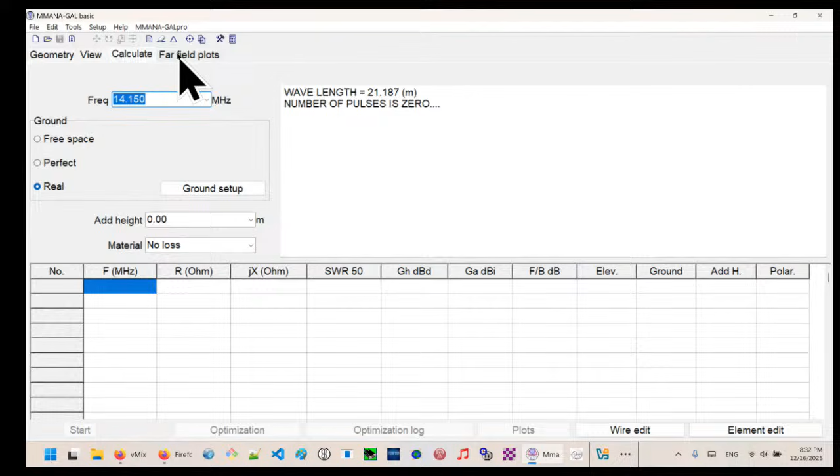Yes. Okay, so what I've brought up right here is MMANA-GAL Basic, as the upper left-hand corner indicates. On the menu bar, you'll have the basic file, edit options that we'll touch on briefly. But I'd like to point out these four tabs right here. This is where the functionality, like a wizard, goes from left to right. We start with geometry, view, calculate, which has the start button. In other words, this is the gut of the program that's going to generate the results. And then we view the far field plots, the azimuthal and the elevation. We'll talk more about that in one second.

But since our goal was to model a 20-meter vertical, let's go ahead and get started. We are in the geometry tab, and we're going to type in here for name, just to keep our thoughts in order: Vertical 20 meters, 20-meter antenna.

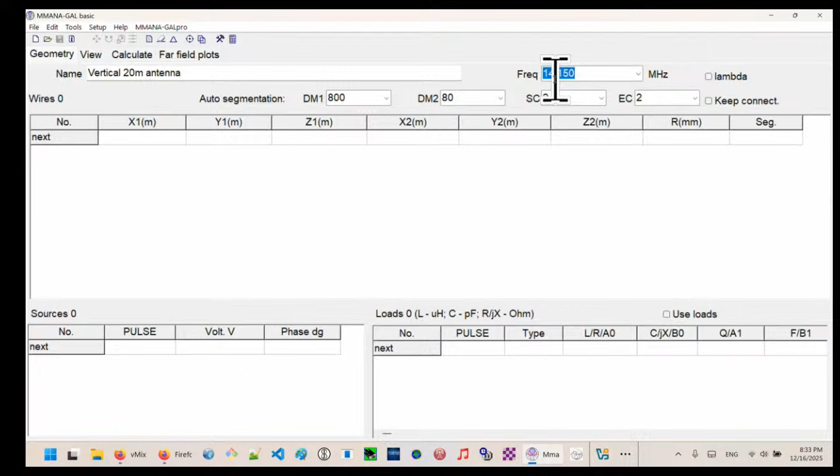Okay, great. So the program, if we hit tab, it goes over here and tells us the frequency is going to be 14.150 megahertz. That's fine. And notice in the main body of this graphical user interface, we have what starts looking like an Excel spreadsheet. If we highlight the first cell here and hit enter, we end up with zeros for X1, Y1, Z1, which is one of the points of our antenna. And then the second point is also going to be 0, 0, 0 at X2, Y2, Z2.

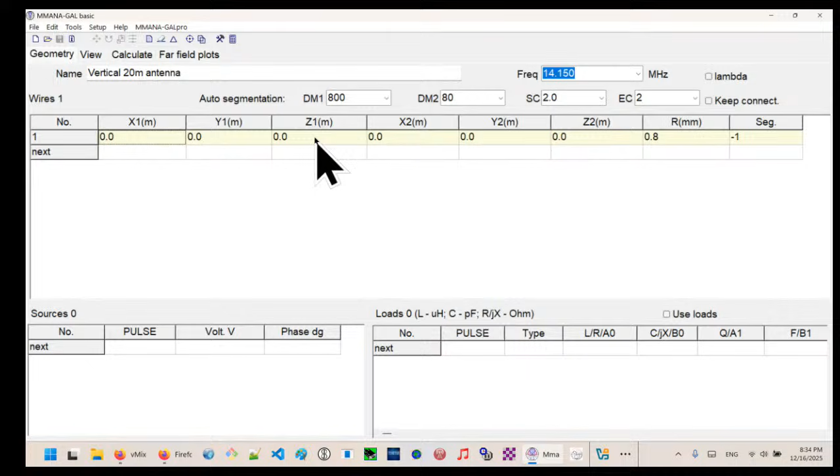The X sub 1 and X sub 2 points are two distinct points that define our antenna. The X1 point we leave at the origin, 0,0,0. The X2, Y2, Z2 point only has one component: 5.1 meters. Notice we're dealing with meters here. We hit enter, and that's all we have to do for modeling the simple geometry we've come up with.

We leave this alone and now go into View. This is a view of our antenna that we just defined in geometry. If we move the mouse sideways while holding down the left mouse button, you can see the rotation of the model. The x-axis and y-axis have nothing, or 0, but there's a displacement on the z.

If we hold the shift key and then drag the mouse down, we're able to move the entire antenna vertically or sideways. This is overkill for a simple geometry like the one we have here, but in more complicated antennas this quality control step is very good, since we can see the antenna we're going to be modeling.

Now we haven't added a source, which is what we're going to do now. We place the cursor over the base of the antenna, right-click, and select 'add source to the beginning of the wire.' Once we do that, the program adds a little red circle, just like in our PowerPoint presentation, in our free body diagram. That circle in the legend denotes the source. That's where we're going to be applying our feed point, our test voltage.

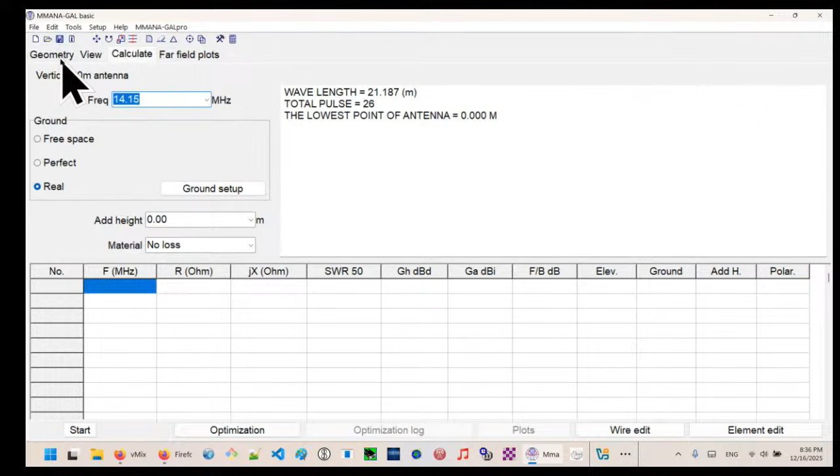If we go into Calculate now, the third tab—3 out of 4, so we're just about there—we're presented with the following. First, we're reminded of what frequency we're going to be modeling, remember we defined it in Geometry. We left the default at 14.15 megahertz.

That's fine. The next step is a box for ground. We have free space, perfect, and real. Free space is essentially an antenna radiating into a vacuum, out in space, and that's too much of an idealization here. So we're going to continue not with a perfect ground, but with a real ground. We select that option box and click on the Ground Setup button.

A dialog comes up that we'll leave mostly default, so no need to worry about it. But I'd like to point out, for example, we're modeling this antenna with default parameters: a dielectric constant of 13.0—the program came up with that, we didn't add it—and a conductivity of the ground at 5.0 millisiemens per meter. That's by default an average type of ground.

If you look in the antenna handbook, the ARRL antenna handbook, or online, you can get conductivities and dielectric constants for different types of ground. For example, if we model over salt water, say we're taking this on a sailboat and want to model the salt water effect, we'd change this conductivity to maybe 5,000 millisiemens per meter to make it more conductive. Or if we're in a desert terrain, we might want to change that conductivity to a very low value. Again, we're able to change this—I'm just saying that in passing.

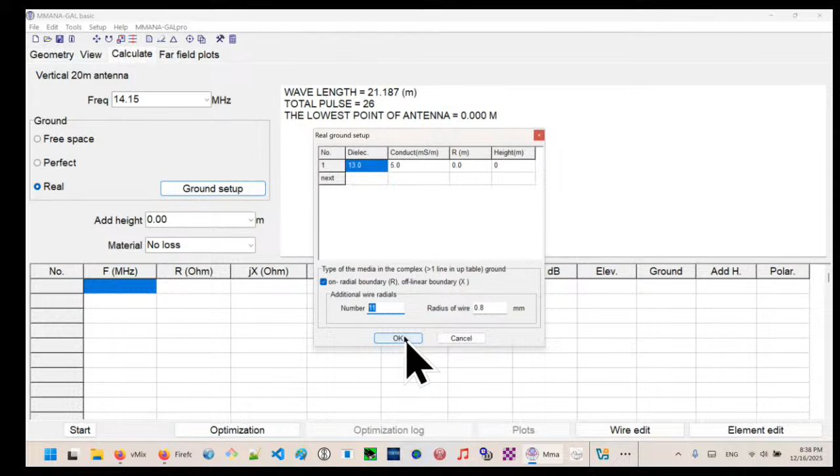The next thing to do is add the height. Remember, our free body diagram had this flush on the ground—the feed point was flush on the ground. So we don't want to change anything away from 0.

We could go ahead and use the drop down to select 5 meters, 7 meters, but we're going to leave it at 0 meters. Again, in passing, we notice that the units are meters we're going to have to use here, and we're going to have to do the conversion if we're keen on thinking in feet.

As far as the material for our antenna radiating element, we select this drop down right here, and we see quite a few options. We're going to select copper wire. Notice there's quite a few others, aluminum wire, iron pipe, and so on, but we're just going to go with a simple one, copper wire antenna. So we're at 0, flush to the ground, copper wire, real ground, we defined it.

Now we're ready to click start. As soon as we click start, the program has run. It's amazing to me still how fast this will run and do these calculations.

I'd like to point your attention to this SWR value right here. It's showing 1.45 for our SWR, assuming feed point impedance, an input impedance of 50 ohms. And the resistance of the impedance, the resistive component, the real component of the impedance for our feed point is 35 ohms, which is fine. I mean, it's not 50 ohms, but it's close.

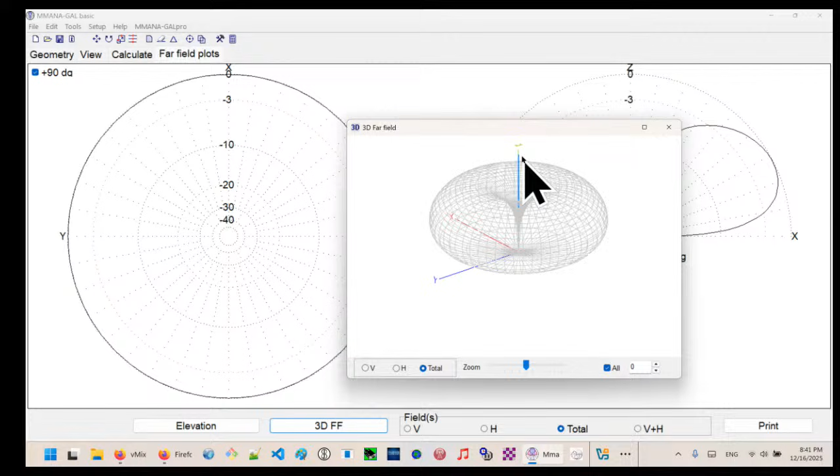Now, of course, this is an isotropic antenna pretty much, so it's going to be homogeneous in every direction. But in other antennas, we're going to have a preferred direction, and this might give us that insight of where our radiation pattern is going to be relative to the antenna. The antenna is that blue line, light blue line right there in the axis. It's a vertical that we did.

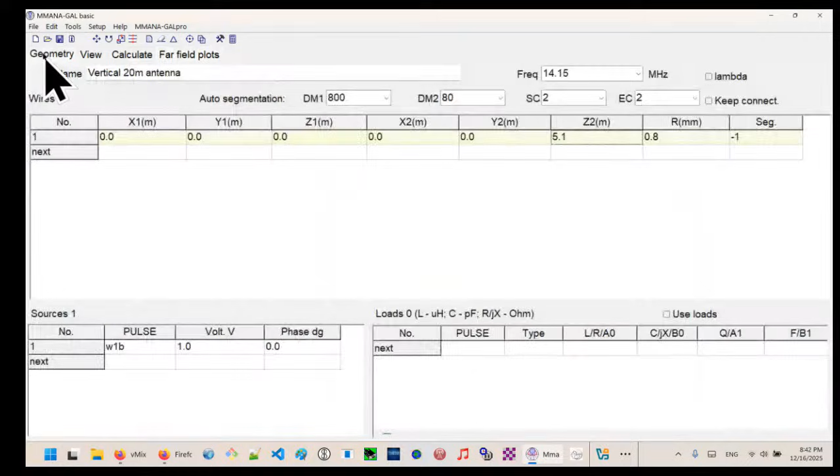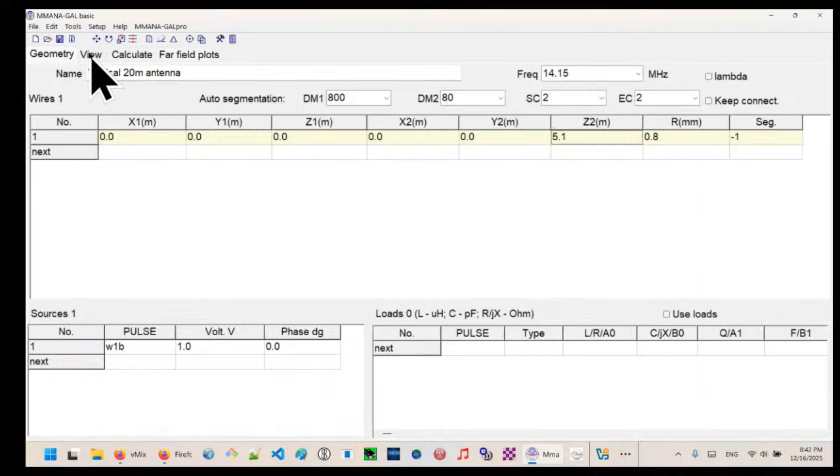So that is as simple as it gets. That is the modeling of our antenna. Once again, we went to the geometry tab. We defined our sub 1 coordinates, x, y, z, in 3 space, and our sub 2 coordinates, x, y, z, in 3 space. And we defined that one at 5.1 meters, whereas the origin was at 0. We double checked our geometry to make sure we weren't drawing any weird diagonals.

By the way, now the program has actually also added this fellow right here, which is the current profile for the current on our antenna. And then we clicked on calculate, defined our ground, our wire, and our height, and clicked start. And after that, we were actually running, getting the results, and even in 3 dimensions. So with that, we've modeled a vertical antenna.

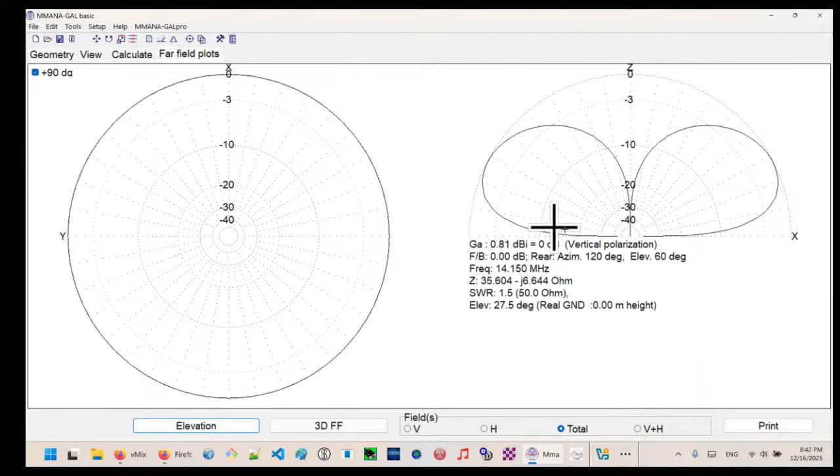So let me pause right quick and see if we can go to our presentation. And in our presentation, we had this exercise, which we just went through. The next exercise was going to be, try this.

I think I should have done it from the current slide as opposed to this, but we'll get there shortly. Well, actually, let's try this. Stop sharing, and then we'll go here and model our dipole antenna. Let me just do this one. And this, yeah. So if we do from current slide, there we go.

The practical exercise number 2 that we're going to do is modeling a 20-meter dipole antenna. Again, with our free body diagram for our dipole antenna, we have this hatched area, which is the ground plane. Okay, now we're not seeing that, we're seeing the slide that says how was the antenna modeling done.

Let's try this. And by the way, your audio has not dropped a single time. Oh, that's a good thing. Yeah, I'm trying the computer. Okay, so if we do this, and now we share this to the entire screen. Okay, so I'm just going to leave it here at this screen right here.

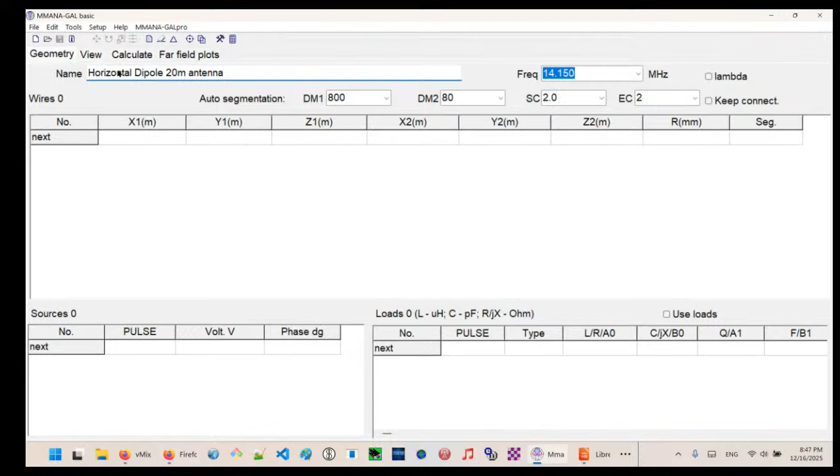So again, this is the MMANA-GAL screen, MMANA-GAL basic like before, and here we're going to define our horizontal dipole. Again, we start with the leftmost tab, geometry. We name our horizontal dipole 20 meter antenna tab, and by default it's going to model at 14150, which is fine. We'll leave it there.

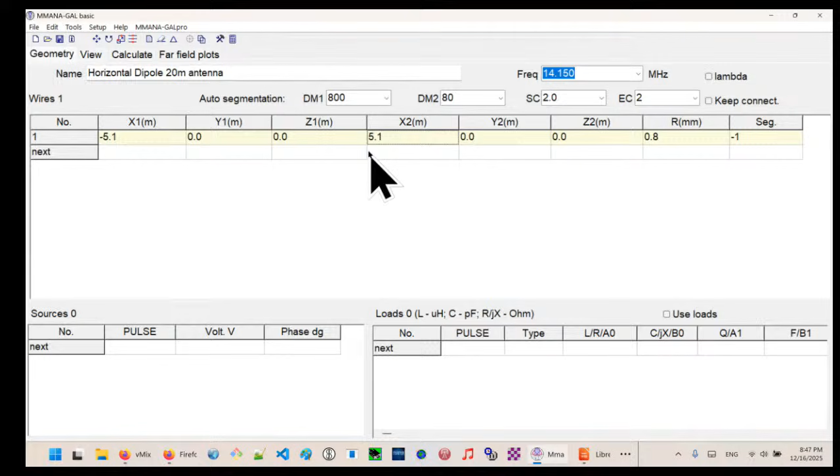We could change this, but as before, we highlight the first cell of what looks like an Excel spreadsheet, hit enter, and now we have our sub 1 point and sub 2 point, the 2 points that define our antenna. This time, we're going to put minus 5.1 meters for the x direction of the first point, and the second point is going to be at positive 5.1. In other words, it's going to be symmetric, 10.2 antenna length. At least that's what we're trying to model. That's where the view tab comes in, to make sure we're not going diagonally or we mistyped something. And it seems like we got it okay. It's along the x-axis. The y dimension and the z dimension are 0.

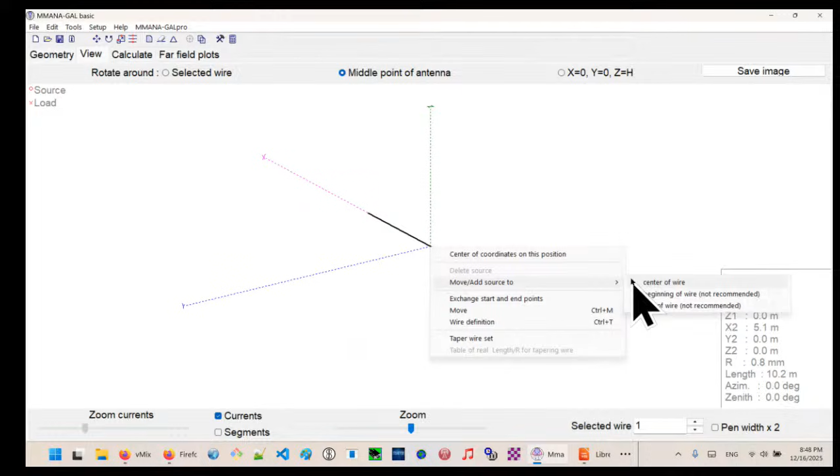We're not modeling elevation now. We're going to model that in the next tab. But we do need to go ahead and add the source. So again, as before, we hover over the middle and say add source to, in this case, the center of the wire. The previous one, it was the beginning of the wire. Now we're going to go to center. As soon as we do that, we notice we have a red circle in the middle. That's our feed point—look at the legend, it calls it our source.

In passing, we notice there's a capability in this program to add loads. That would be for a future video, but we could actually add coils and loads, more complicated geometries in other words. But not now, we'll just continue with this simple dipole.

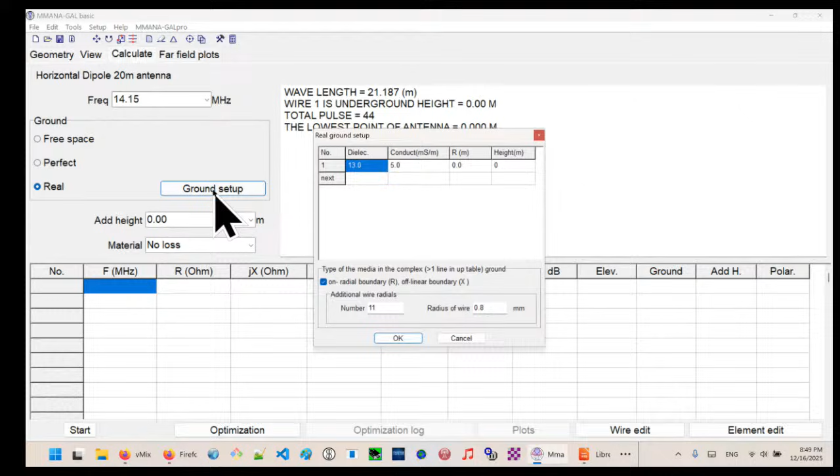When we click on the Calculate tab, as before, we double check the frequency we're going to be modeling, 14.15, that's fine. Now, the ground—we again go with real ground, and this time we click on ground setup, and here all we're going to do is leave the ground the same, but we're going to remove these radials because it's a horizontal dipole, so we're not going to be too interested in radials. Now we said we're going to do it at a height of 10 meters, so we'll go and put 10 right here.

Fair enough. Click on start. And here we go. Our antenna's SWR, this parameter we look at, is showing us an SWR of 1.88, assuming a feed point impedance of 50 ohms. That's not bad, it's less than 2. The resistance of our feed point is 73 ohms. Okay, it should be 50, but we can live with that.

Let's look at what our radiation patterns are. When we click on the radiation patterns, we get something different than we did before. Now, this is a horizontal dipole, so we would expect it to have a different azimuthal radiation pattern than our vertical.

The left-hand side has our azimuthal plot, the right-hand side has our elevation plot. Think of the azimuthal plot as where the cursor is - that's the crow, like a bird overflying our antenna. It passes the origin and keeps on going in this direction. Remember, we modeled it with minus x, x at minus 5.1 and 5.1 positive. So this is the axis of our antenna.

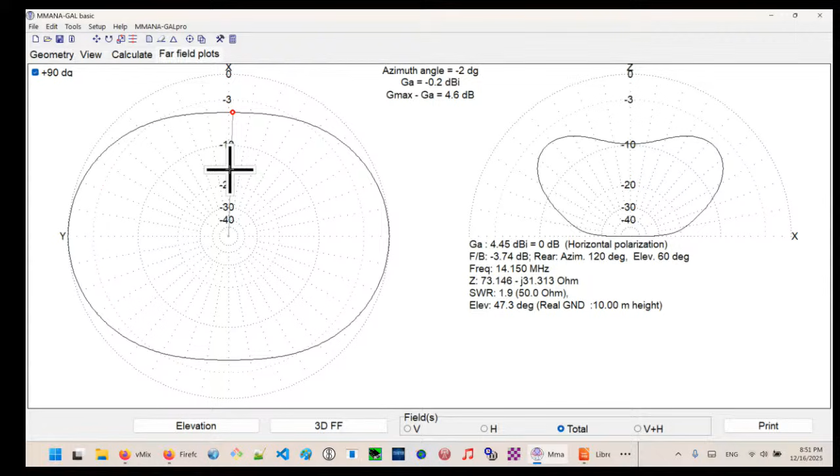This is actually useful for comparative purposes. The idea being not to get too hung up on the actual value of minus 0.2 dBi versus 4.4 positive dBi here, but relative. This is more of a null compared to this. A relative measurement is what we're getting here, not an absolute dBi that we want to hang our hat on.

The other thing we notice is the cut across way - it's like we took a chainsaw right across our azimuthal plot and we get this elevation plot. We can hold down the mouse and see at 5 degrees what this would look like. So we start seeing if it's going to be a good DX antenna in this direction or that direction, or more of a cloud burner if it's radiating in this direction.

But as before, you and I think better in 3D, so let's click on the 3D view, and we get this type of a flattened bean or squished figure, which is exactly what we'd like to see.

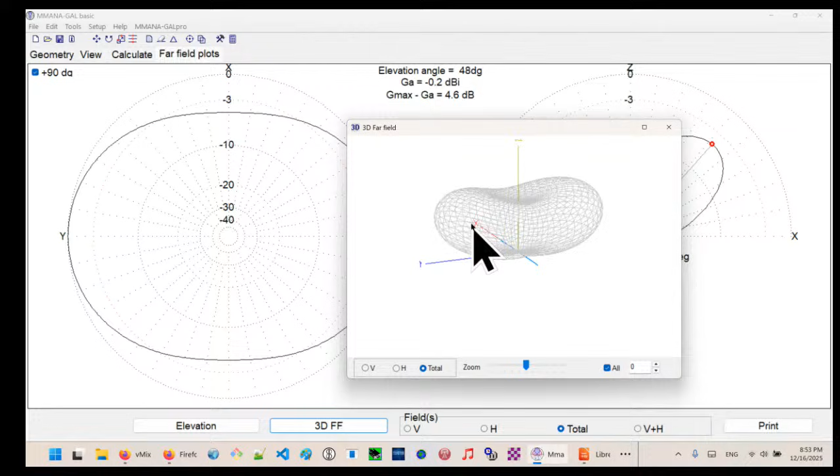If we see that we are on the x-axis here, you see the light blue right there? That's where our antenna is. So we're seeing that it's not going to be very good straight up, which is a good thing - it's not a perfect cloud burner. It's going to have strong lobes in those directions, but they're both going to be broadside to our antenna. Our antenna is aiming this way, and broadside to it, 90 degrees off, is where the strongest radiation gain is going to be.

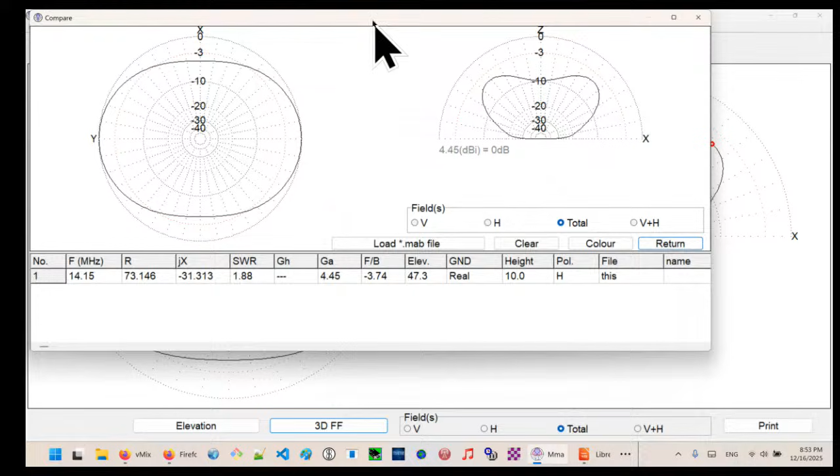Okay, so now hang on - it would be nice if we could compare this to our previous display. Well, there's a functionality here that actually says compare. These two sheets superimposed gives us this display, which is the same as what we have back there. But bear with me, if we say load MAB file, we can actually compare it to previous ones we might have saved, and we save it by going into File and Save.

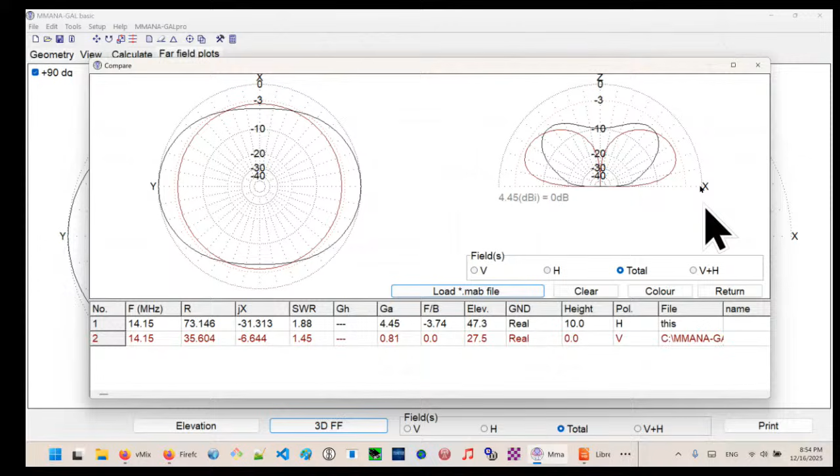But I saved the vertical 20 meter, so let's compare it. Now we can actually see something interesting. For DX, it seems like at 5 degrees, which would be right about here, the gain of the vertical antenna, highlighted in red over here, is better than the gain of this dipole, at 5 degrees. So that's a comparative feature that this program has to compare different antennas.

Also, we could go ahead and say, well, what about if we click on calculate and we change one of these parameters? What if we change the height? Maybe we don't want to hoist this antenna up 30 feet - what if we just hoist it 15 feet? That would be about 5 meters. So we click on that, we click start.

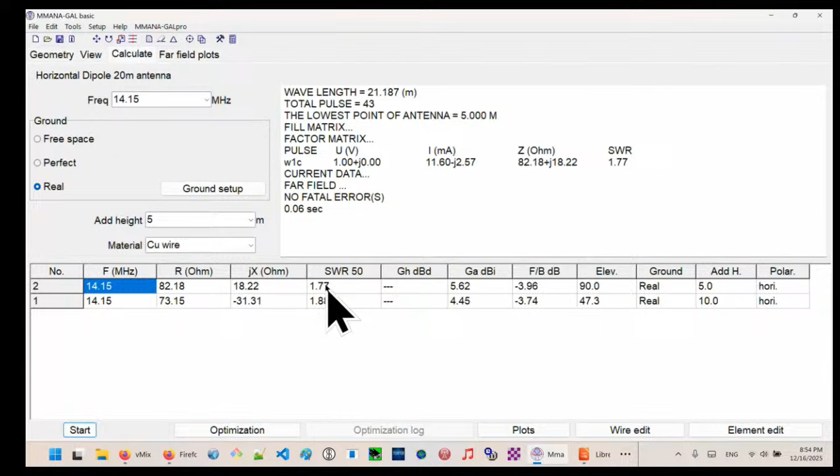SWR is 1.77, resistance is 82. What about our far field? Just by lowering our antenna from 30 feet down to 15 feet, remember we went from 10 meters down to 5, then at that point we're seeing that this antenna is much more of a cloud burner than when we hoisted it up 30 feet. So from that, we're getting insight into the effect of displacement in the Z direction of our radiating element, for this geometry.

So with that, we're going to go to the final exercise, which may be a bit more challenging. But any questions on this? Is this clear as mud?

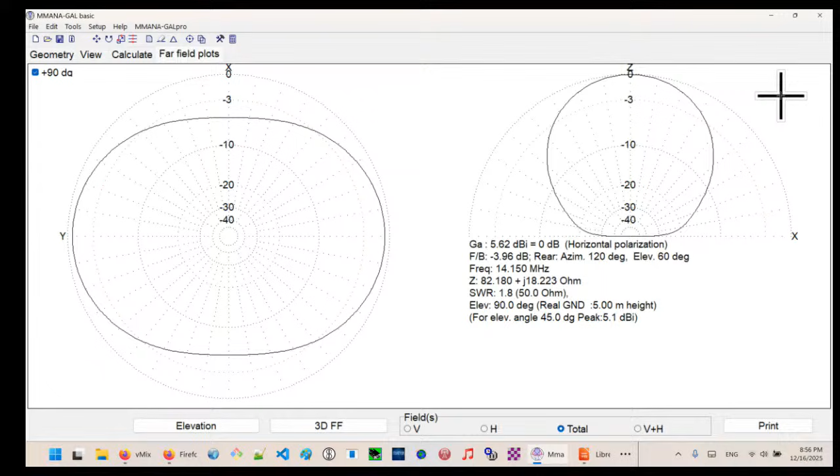Well, I'm following you, and it's interesting how you can easily change things like the height above ground and see the different patterns here. I think that would be good, Tom. Lately, the last month or two, I've been experimenting with antennas, and I can watch them on the analyzer, and as I pull them up in the air, you can see a big change when you go through 10 feet, 15 feet, 20 feet. So there are some points there that probably make sense in stopping. I mean, height is not everything.

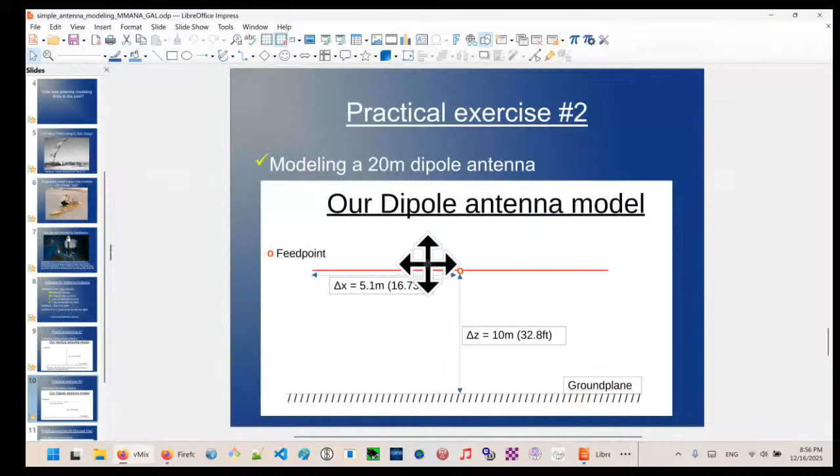Exactly, exactly. So I think you're going to love this final exercise that we're going to do. Let's go ahead and close our MMANA-GAL, and if we go here to our presentation, I'm just going to go like this. Okay, that's fine, one space down. This is going to be the practical exercise number 3.

This is the last one, so I'm not going to bore you anymore. But this one is a cool one. This is called the end-fed half-wave antenna.

So then the question that can be asked: what if we model this antenna without the counterpoise? Will that have an effect? I think that's going to be some interesting insight. Oh yeah.

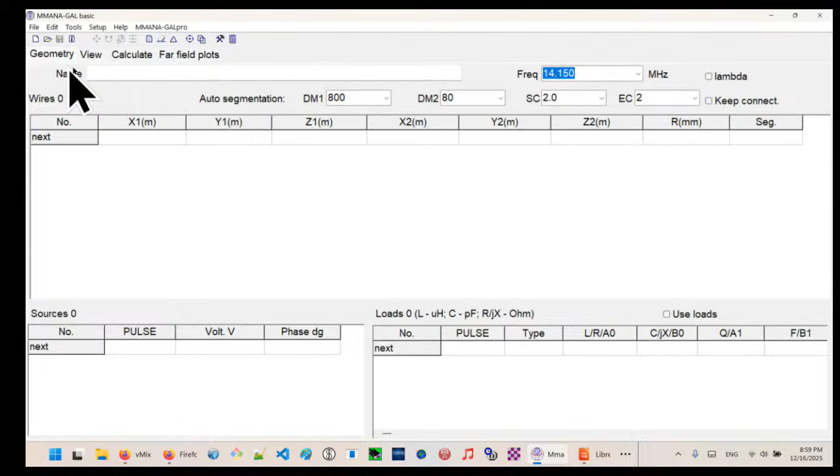And there we go. Once again, we're presented with MMANA-GAL basic, and we're starting in the view over here, configuration. We can go to geometry.

Now what we're going to do here is go for the end-fed half-wave antenna. And notice we're not putting a 20 meter or anything like that, because this is going to be resonant on multiple frequencies, and I think that's going to be interesting to see.

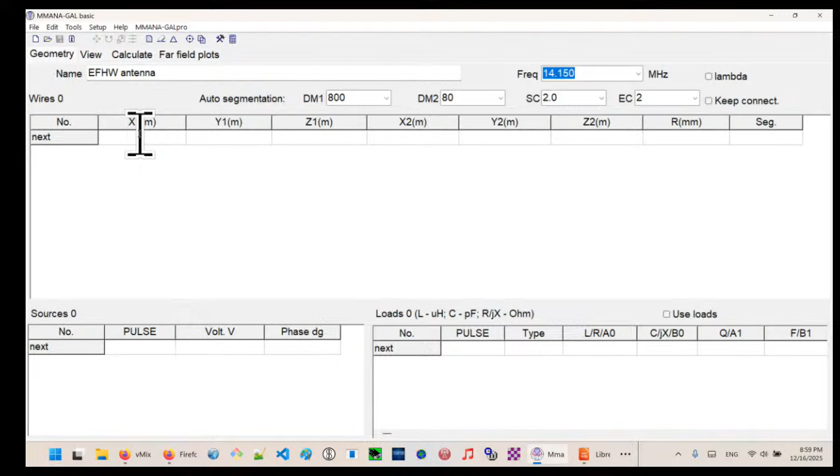So as usual, we go ahead and go into here to the first cell, hit enter, and we see that we have our sub 1 point and sub 2 point, 2 points in 3 space that define our antenna. We're going to start at the origin there, 0, 0, 0. We're not going to change that.

Our x2, though, where we want to take that one to, is going to be 17.68 meters. Hit enter. And our z2, our y2 is going to be 0. In other words, we're going to be flush or coplanar to the xz plane. I'll show you in a minute here with the view presentation.

10.218. That's what the calculation showed to be, to account for a 67 foot length wire, which we're going to start and see how that works.

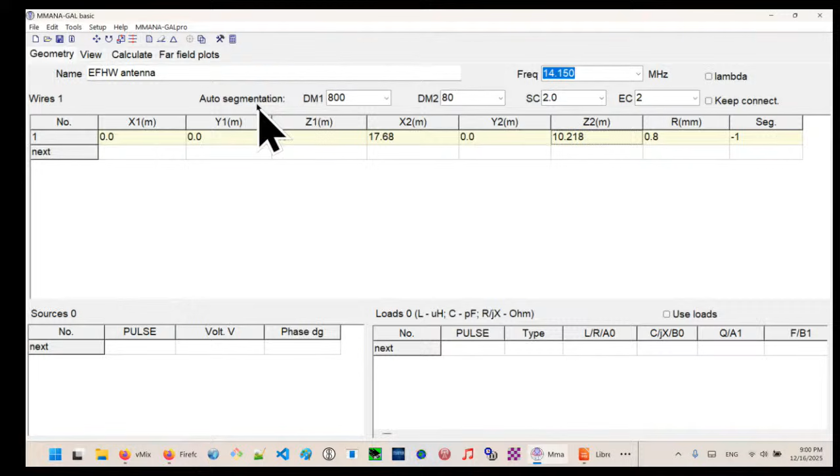Great. So now, as before, we click on view to make sure that this makes sense, makes physical sense before we start running our modeling. We again hold the left mouse key and the shift, and we can actually move this around. We let go of the shift key and we're able to move it.

And we see right there that our antenna, that black line, is coplanar to XZ. In other words, it's flat against the XZ plane. Once again, we just do this, and we see we don't have any displacement in Y. So that's okay. That's what we wanted to model.

Before we leave this screen, normally we define our source. So we hover over the base of this fellow. We right-click add source to the beginning of the wire. And there we are. We shift, left mouse click to lower this down, and we see right there our 0, or our little red O, which according to the legend is the source. So it seems like we're modeling the right geometry.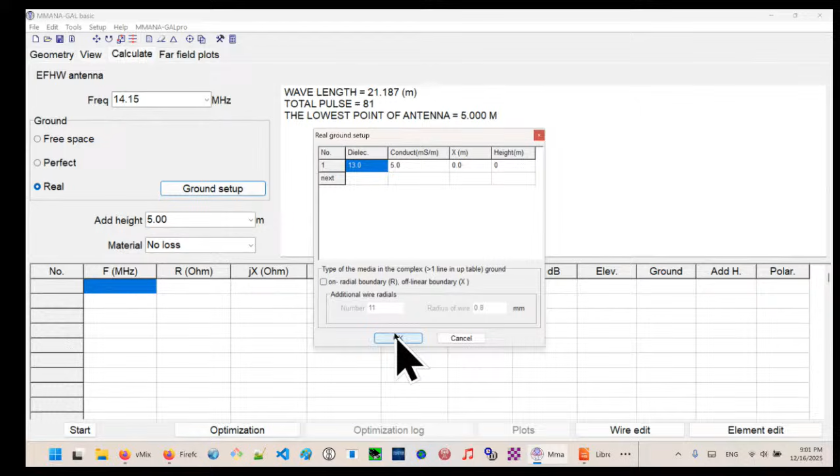Now let's go calculate. For this one, let's make sure our ground hasn't changed. No, we're not considering radials, and we're good. So I'm going to just assume a basic type of ground.

The height, remember it from last time, but we want to do it at 1 meter. Remember, we said it was going to be about 3 feet off the ground that we're going to tie our 49-to-1 transformer to. Oh no, the drop down doesn't show a 1 meter. It says 0 and 3. But hang on, what if we just change this over here?

The guy said this was a free text, so yep. So it is a free text, and we just changed it to 1. So it took it. So we added a height of 1 meter off the ground, and we're going to say model it of copper wire.

Okay, great. So now, as before, we just mindlessly say start, and we got garbage. Why? Well, because we're getting an SWR of 1 to 12,273.

But wait a minute. For an end-fed half wave, remember, we have a 49-to-1 transformer. Well, how do we model that? Well, the input impedance of this model that we just ran is 50 ohms, but that's not correct. If we say 1 to 49 is 50 ohms to what value? Well, 49 times 50 is 2,450 ohms. So our input impedance is going to be 2,450 ohms.

So we need to change that. For that, we go to Setup, and there's the option under Setup called Setup. And right here is where we change the standard resistance of the feed point. So we go ahead and put in 2,450, okay? And now we say, okay.

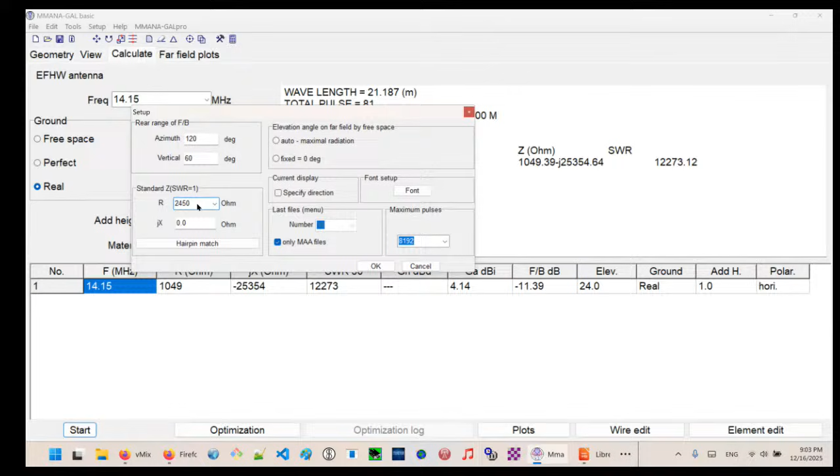Great. So the program just ran. The good news is we're now modeling a feed point impedance of 2,450 ohms, purely resistive. But the SWR continues to be 1 to 252. That's not good. So what could be wrong, right?

I mean, as engineers, we go ahead and troubleshoot. Let's go back to our view. And at this point, one thing we notice is, you know what, we're not modeling that counterpoise. We should, we don't have anything back here. It's like 0 counterpoise. Well, let's model a counterpoise.

So how do we do that? Well, we're going to model a second element. We go to the next row and hit enter.

And here we have the sub 1, the origin is still going to be the original point, point number 1. But point number 2, along the x direction, we're going to say minus 2 meters. Why minus 2 meters? Because when I go to the park, I usually have a coax that's about 6 feet, maybe 10 feet, all the way from my radio to the 49-to-1 transformer. So let's model it as a 6-footer. Why 6? Because remember, this is meters, so we have to multiply by 3.2808 to get feet. So it's right about 6 feet.

Okay, let's look at the view and see if we did something wrong. If we move this sideways using the left mouse button, we see that we've indeed put in our counterpoise, our little pigtail right there. Okay, cool, so that seems to be working.

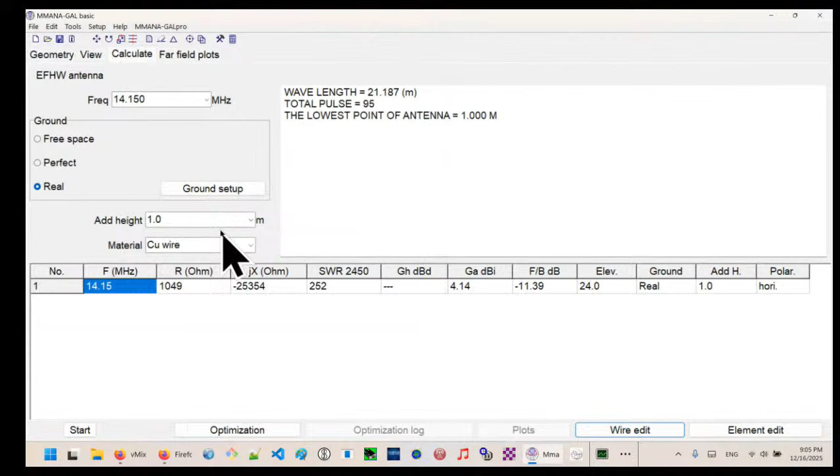Now if we go to calculate, leaving everything the same, we haven't changed anything, meters, so that should be 1.0. Right? 1.0, okay, and copper wire, and now we say start. Okay, so just two possibilities. One, we had a height of 10 meters over here at one point. Let's see if we put that to 10, just to make sure we got this right.

Click start. 1.69. So the delta Z, the displacement in Z, is not having much of an effect.

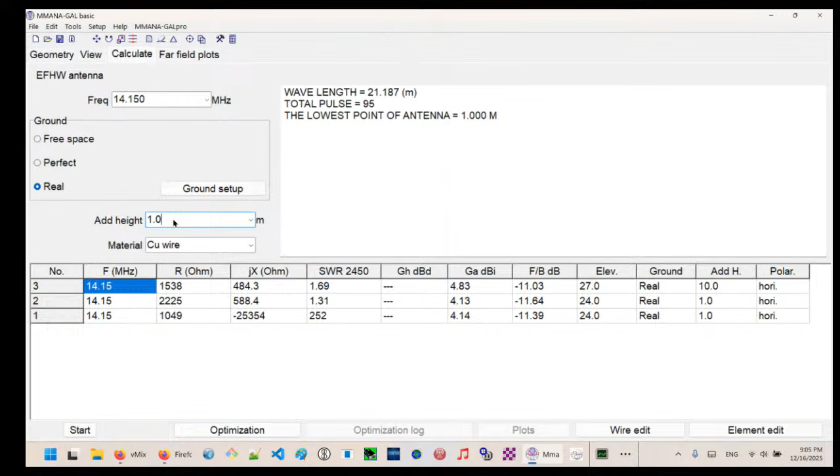But we said that we would go ahead and put our transformer at 1.0 meters. So we go there, and we get an SWR, assuming a feed point impedance of 2,450 ohms, purely resistive, of 1.31. Now we're talking. The resistance, of course, is going to be 2,225. But wait a minute, we're expecting it to be 2,450, so that's okay. That's what that 49-to-1 transformer is going to do. It's going to knock this down to 50 ohms to make our radio happy. That's fine. Let's look at the far field plots.

Okay, now we're seeing something interesting. Again, azimuthal plot on the left, elevation plot on the right. The crow flies over. Our antenna is along the X direction, and it seems to have some lobes here at 20 meters, with this cut-across shape that sort of looks like a cartoon shoe or something.

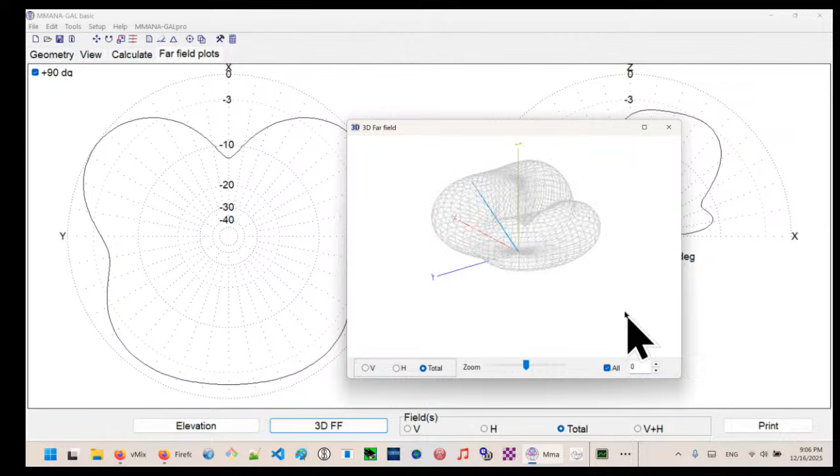We go to the 3D view, and we start seeing something more interesting. We just move the mouse sideways, and we start seeing our antenna starting at the origin and going all the way up to that tree. And away from that antenna, towards the 49-to-1 transformer, we're getting this lobe right here that is pretty much hugging the ground. So that might be a good DX direction for our end-fed half-wave.

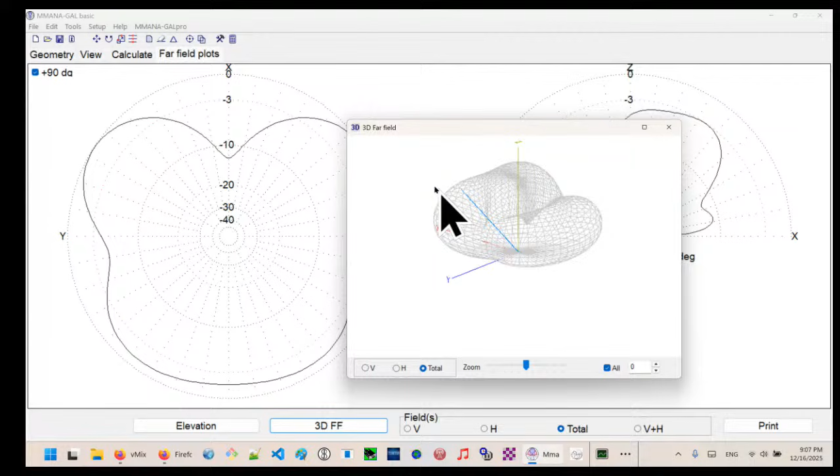But what about these other two lobes over here? Well, those other two lobes may be a little bit more cloud-burning, but not totally. If we close this, yeah, they're going a little bit high, but not that high.

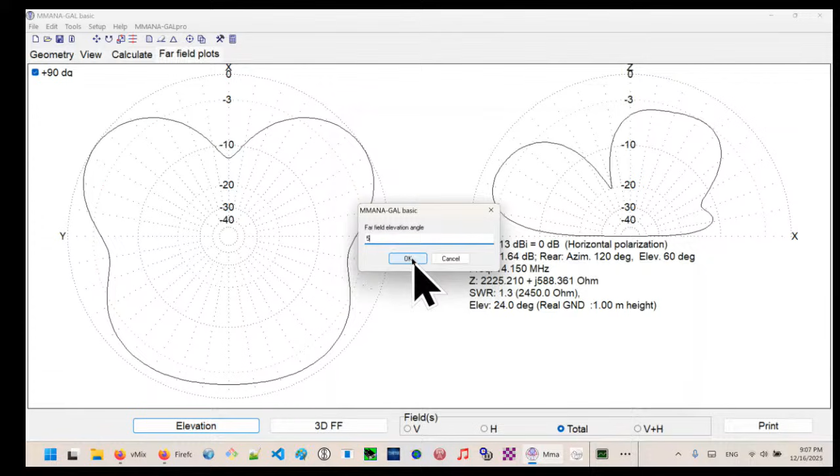azimuthal plot. Gain of 3.31 in this direction. There's a null there of -10. And I'm looking again up here at the gain, -5 up here. So that's -4.6. That over here is -3.3. So definitely getting more gain in this direction, which is good because that'll be the DX direction. And this is at 5 degrees that we're seeing now.

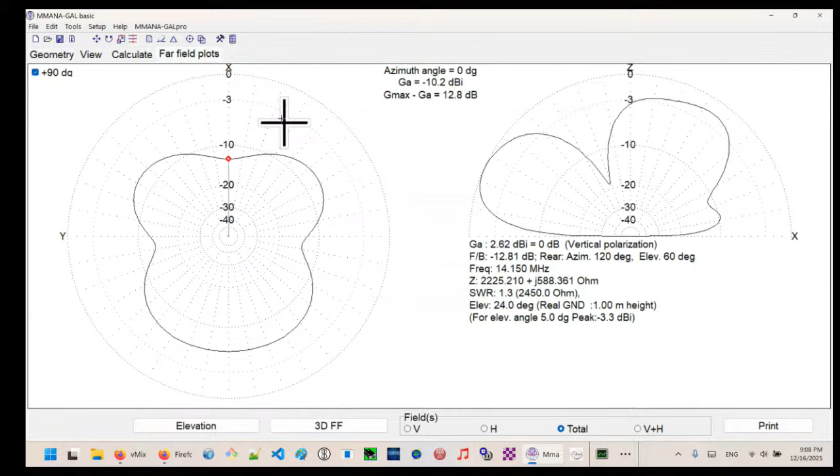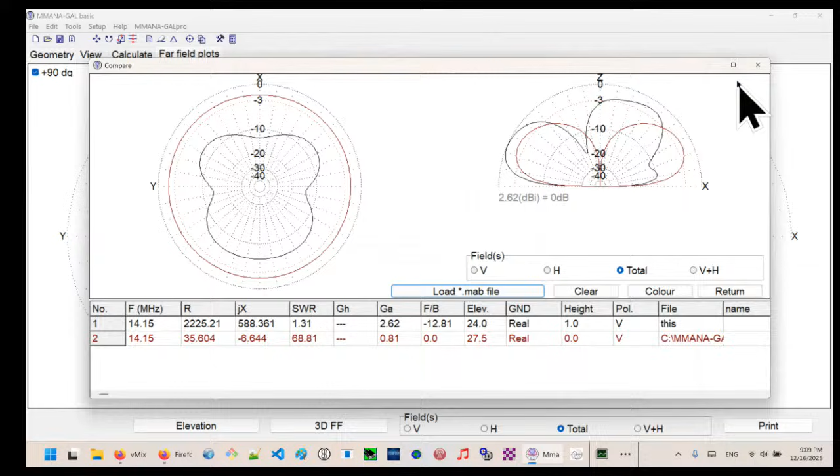So now with this, we can actually compare it to, say for example, the vertical. We just clicked on this button right here to compare, load a MAB file. And from a previous run, I did the vertical right there, open it. And you can see that the end-fed half-wave at 5 degrees is a little bit better than the vertical. The vertical is this red shape here that looks like a donut, whereas in this direction, the end-fed half-wave is going to be better DX. So just with this basic insight, basic entry of parameters, we're able to get some good insight on this application.

One other thing, remember we mentioned that this would be a multi-frequency antenna. Well, how do we do that? What do we have to change? Well, not much. Remember, this is a drop-down over here for frequency. Again, I'm in the Calculate tab. Click on this right here and say let's model it for the CW portion of 40 meters. In other words, 7.050 megahertz. Click start.

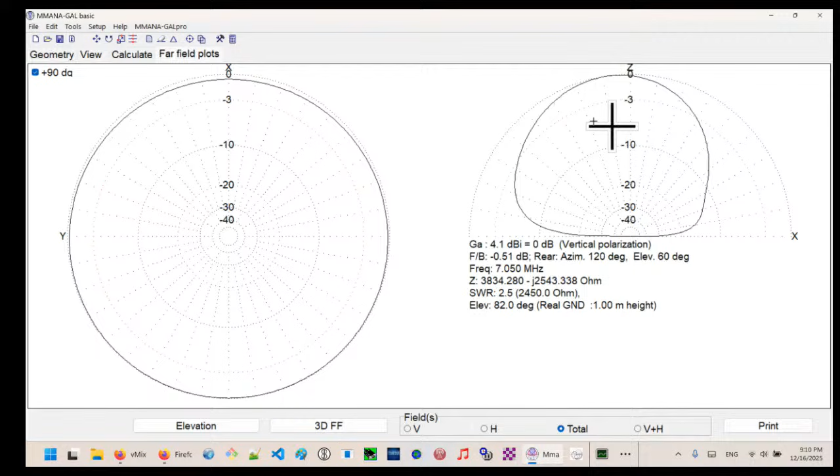2.49 SWR, okay, not terrible. It's still under 3, but look at our far field plot. Totally changed now, very much a cloud burning state. We haven't changed the antenna, it's the same antenna, but now at a different frequency it behaves differently. Our azimuthal plot is now very symmetric, and our elevation plot, or cut across view, is looking more like a cloud burning configuration. Let's continue with this.

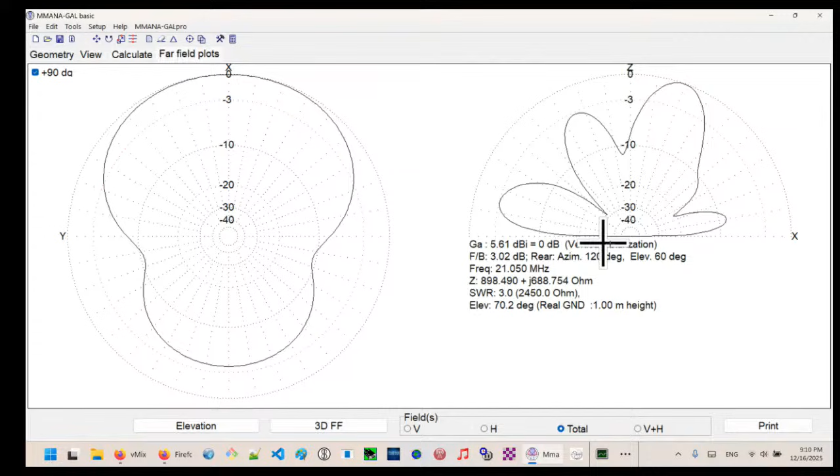What about if I model the CW portion of the 15 meter band, say 21.050? Let's select that, click Start, everything else being the same. This antenna should work okay, less than 3.0 in SWR, but now the radiation pattern is quite a bit different. So we're getting insight about how this antenna behaves in different frequency ranges.

One question we get asked a lot is, what about using this in the 80 meter band for the local nets around the Houston area? When we select 3.550 and click start, SWR goes crazy, 539. So what the modeling is telling us is this is not a good antenna for 80 meters.

Don't expect it to work on 80 meters. So with that, let me pause before we go into the final bit of this presentation, which is going to be the optimization functionality.

Any questions or any doubts? Am I going too fast? You might have any questions or anything? I haven't seen any questions. I've been trying to follow it myself.

It appears, looking at all these steps, if you can only remember about 6 or 7 steps of where to click, you can model just about any antenna. You don't have to be a rocket scientist here. If you can just remember those 6 steps.

Yeah, exactly, that's what surprised me, Tom, because antenna modeling in EZNEC is a heck of a lot harder, to me at least. When I saw MMANA-GAL, I thought, okay well, that's the 4 tabs. It's like a wizard, you start from left and go to the right, and you get your answers. So it just, yeah, I liked it.

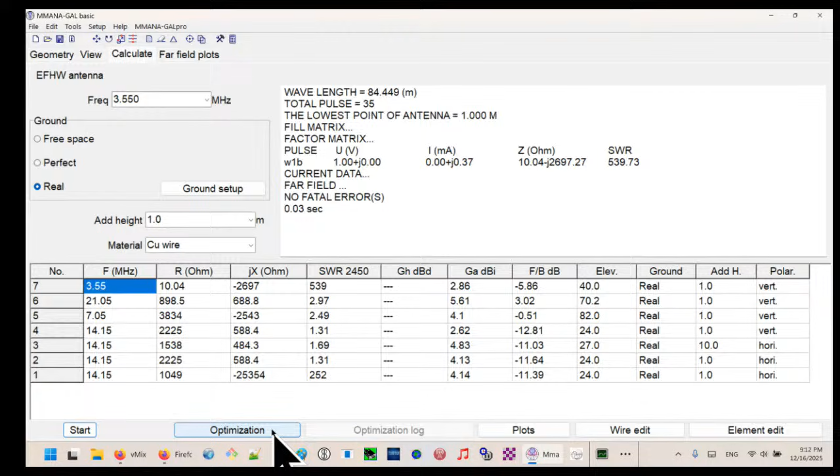Okay, so we'll go into optimization, and that's the last thing I want to show you here. Click on optimization, and we get this dialog right here. It's a little bit cluttered, so just bear with me.

Let's split it into two, the top 50% and the bottom 50%. The top part is what we're going to optimize for, with left being not optimized and right meaning optimize. I'm moving the SWR tag over to the right, meaning optimize for SWR. The match is not being optimized for, so I'm going to say optimize for that too. The other ones, front to back, current, reactance, gain, I don't care about, so I just want to optimize SWR and match.

Now for the bottom part, the bottom 50% as we called it, this is the parameters that we're going to be tweaking. Okay, fair enough.

Click on that, that was a left click, by the way, and click on wire. We can change other parameters, leave that for later work, but for wire right now, let's say wire 1, and we're going to optimize something for X2. Remember, the value for X2 was 17.68. Then again with wire 1, we're going to optimize the other parameter, Z2, and again the value is populated here. Remember, we entered 10.218.

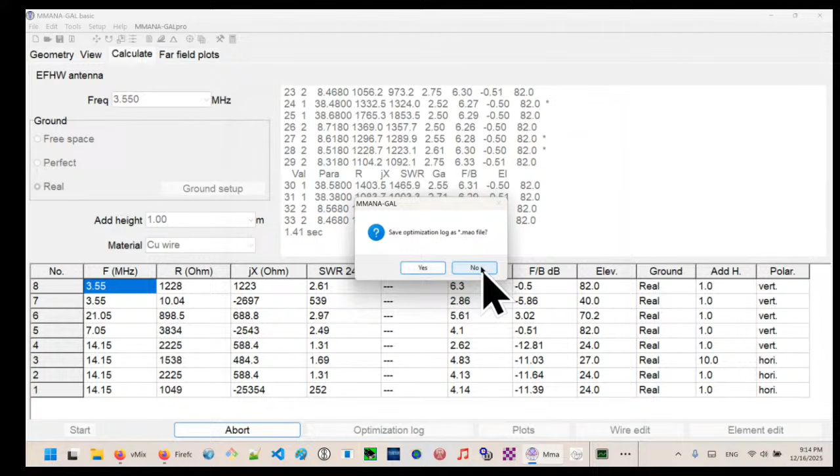So even with that, we're able to get some optimization for this 80 meter antenna configuration. Once we go to geometry, we notice it's changed our values considerably. In other words, this isn't the same antenna anymore. Remember, for X2 we had 17.68, and for Z2, 10.218. So I guess this tells us that yes, we could still make it work at 80 meters, but we're going to be changing the configuration quite a bit.

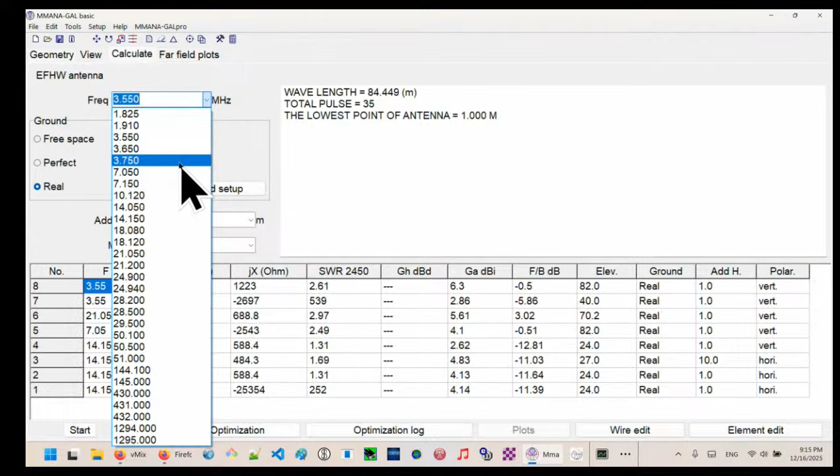So let's go back to 17.68, and the other value we started out from our model, from our free body diagram, 10.218. Once we have that, we can change the frequency over here to 14.050, and we say start, 1.69, okay.

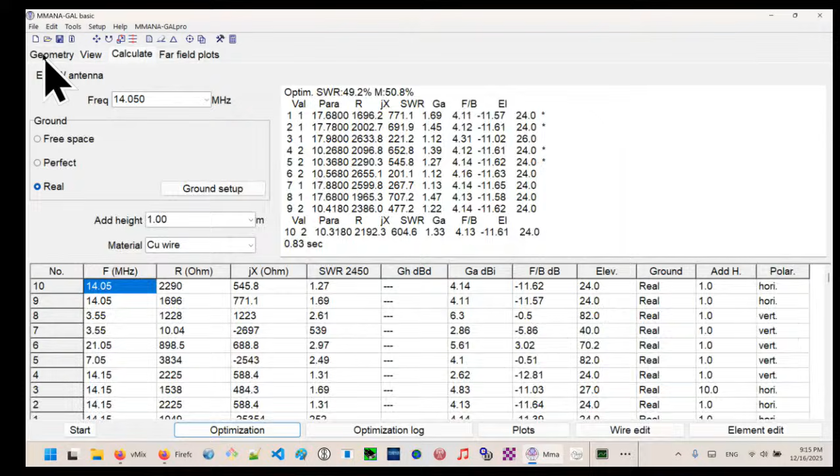We could optimize that. And we say start. Okay, we went from 1.69 to 1.27. And if we go to geometry, it's changed from, we started out with 17.68, now it's 17.78, and the delta z, or z displacement, started at 10.218, now it's 10.368.

In other words, the program is giving us the insight to say, instead of 67 foot, you might want to cut that wire a bit longer, and then the mathematics works a little bit better. You get a better SWR if you're able to do that, to get it a little bit longer. And of course, that's probably what we do anyway. So this is the type of insights we get from this program, how much wire to cut in some cases. And we could do similarly for this one right here, the length of the pigtail.

We could optimize that, but it's simple, like what I just showed with the optimization tab. Click on it, go to wire, say wire, and then we'll remove these other ones. We're not going to optimize wire 1, so we say delete this line. Okay, here, we'll say wire, and it's going to be wire 2. And then, I think this was X2. Wire 2, I have to hit enter.

And X2 shows us a value of negative 2 meters. Remember, that was our 6-foot pigtail. So say we go from negative 10 to, I have to remind myself to hit enter. Enter, and then we go to a maximum of 0.

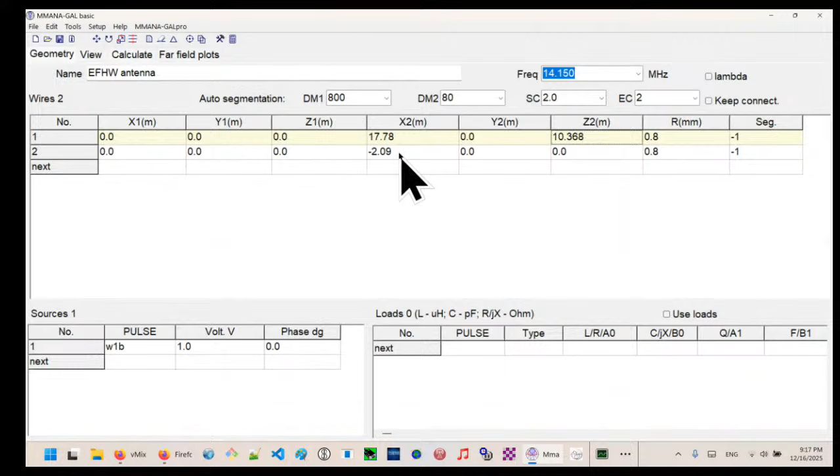So all we're saying is, everything else being the same, what is our pigtail value? Do we need to consider a longer pigtail or a shorter one? We say start, and it gave us 1.29 for our SWR. And if we click on geometry, it just increased it right over 6 foot, so 6 foot is probably a good length for our pigtail.

So we're getting all these insights or suggestions to try from our very simple model, very simple program. So that's what I wanted to show you, Tom.

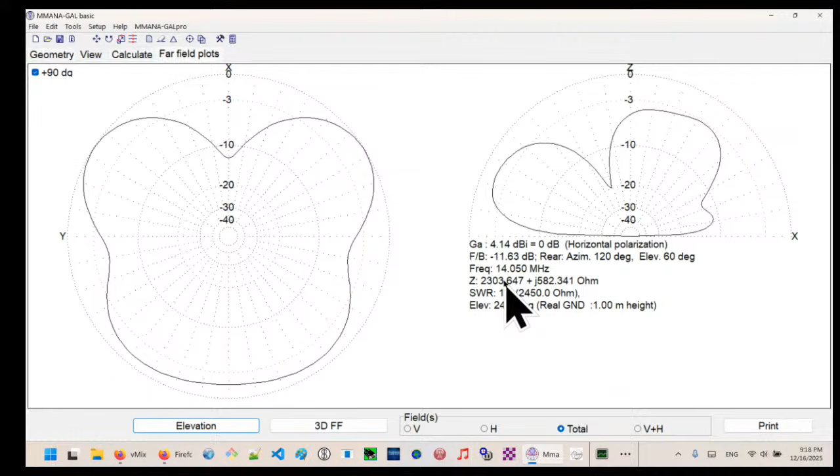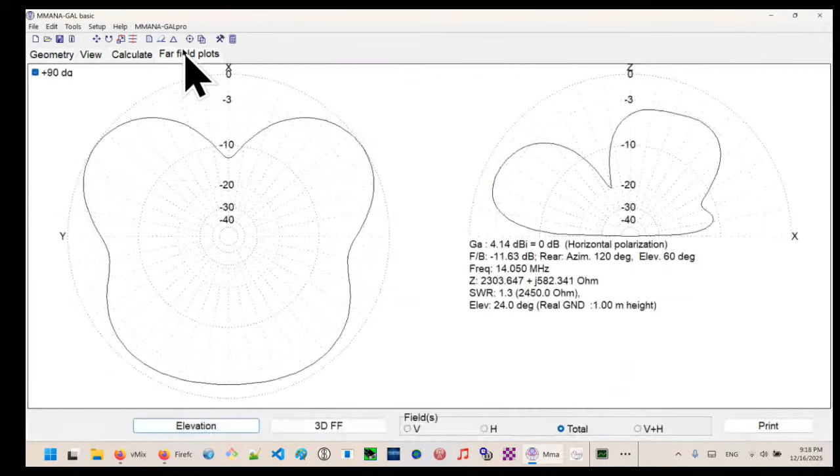I mean, it's just like you're saying, it's like a wizard. You go here, change a few things, validate that your design is correct. Make sure your ground is correct, wire and elevation, displacement in the Z direction is what you want, and hit start. Then see the far field plots for some insight.

So that's pretty much the presentation. I'm really keen on any questions or anything else that folks might have.

Okay, very good. Do we have any questions in the chat room that you'd like to ask Stephen? I mean, I'm seeing it's pretty simple, 6, 7, 8 clicks, and you can model something. But I might have to practice with it a little bit.

Let's see. Yeah, Brett's saying even he had to experiment with it some. One of the things I discovered here recently.

I could put a lot of that information into AI, like the X.com AI or ChatGPT, and it'll actually come back and give you some modeling for an antenna. You can input a lot of those things in here. Have you ever tried that? No, I haven't, but I think now you've piqued my interest. That's something to try.

Yeah, absolutely, just go. Again, it's a tool, a software program, a modeling program. But now with the AI tools becoming available, absolutely, we need to try them out. I tell you, AI is getting so smart, you can actually go in there and say, model me an antenna, a vertical antenna for this frequency, 4 radials, and show me the pattern, and it'll do it. Now I don't know how it compares to this program, but it's probably using this program to do it. I don't know, man.

You're the man! I've been looking for this for weeks.

All right, also, if you guys have not followed us much, we had a visitor on the show the other night. Here he is: 'Hey Tom, I just wanted to let you know that when we get our mission to Mars going, I want to schedule you and your show to be the first to communicate with us in space. By the way, I never miss an episode of Amateur Radio Roundtable on Tuesday nights on W5KUB.com.' All right, well, I just wanted you to know that. Elon, he calls in just about every night to the show. I don't know where he was tonight.